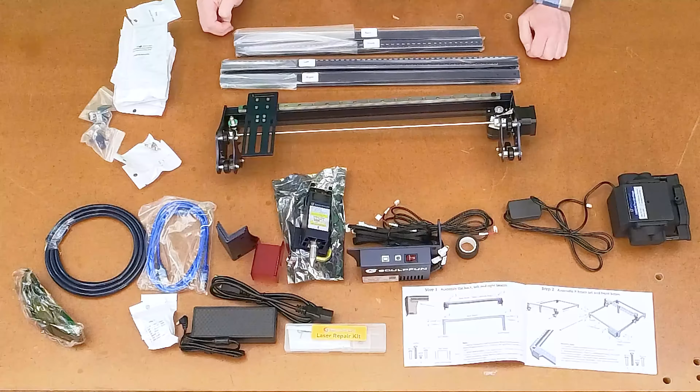I have all the pieces and parts out of the box. It looks like it's not too many pieces and parts, so it looks like it's a very doable machine to put together. Shouldn't take too long. I'll do a quick flyover with the camera so you can see what these look like up close.

The first thing I really want to take a look at is the parts bags, and it does show that this is the parts bag for step 1. And it calls out all of the different fasteners and parts that are in this parts bag. If I look at the next parts bag, this is for step 2, and it does the same thing. It calls out all the pieces and parts that are located in that bag.

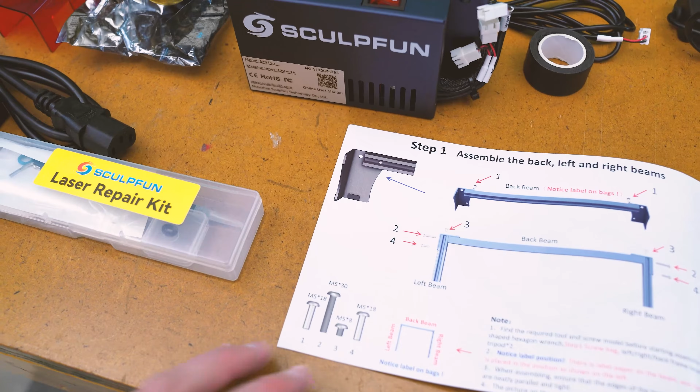When I move over to the manual, it'll show me that inside of step 1, here's screw number 1, number 2, and number 3, and that corresponds to the contents of the package. This is screw number 1, and there's 2 pieces, and so on and so forth. It covers all of this, matches up, and it clearly shows you what screw number goes in what location.

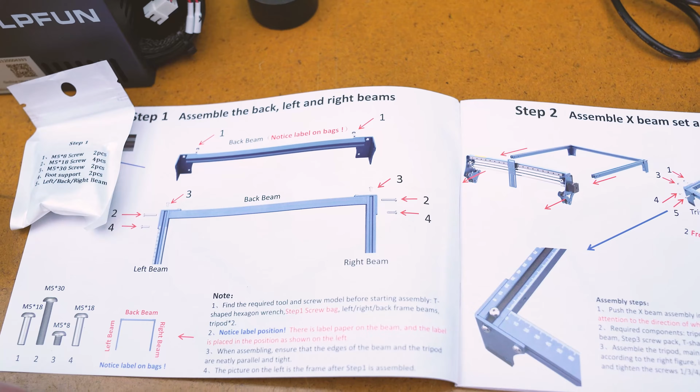Yeah, I really love the texture on the top of this power pack for the machine. It's got a neat thing. It's just one of those little things that I like to see on the machines.

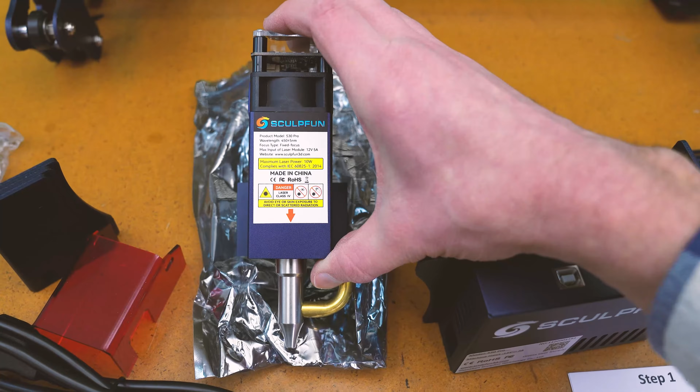And here's the star of the show, the 10-watt laser module. This has the included and installed air nozzle. Now this nozzle screws on and then is held in place with a set screw that's located right here. So this air nozzle isn't going anywhere. All metal construction, very firmly attached to the laser module itself.

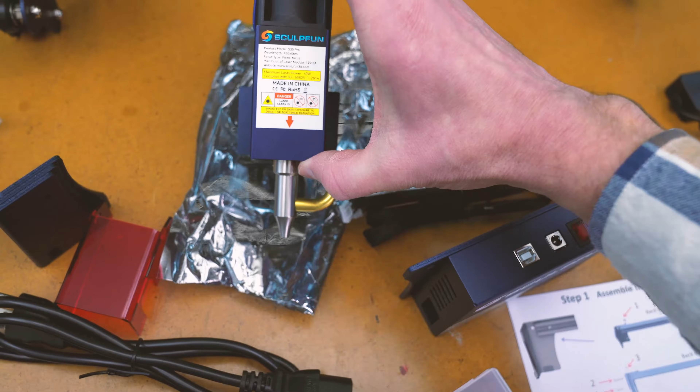Here's the main controller board. On the back is the wiring harness that comes out, and each of the ends of the wiring harness is labeled to what it gets connected to, along with the separate harness. And again, all the ends are labeled. And that's the overall theme on everything in this kit. From the rails here, everything is labeled left, right, back to front. So it's very easy to identify what part is what as it corresponds to the manual.

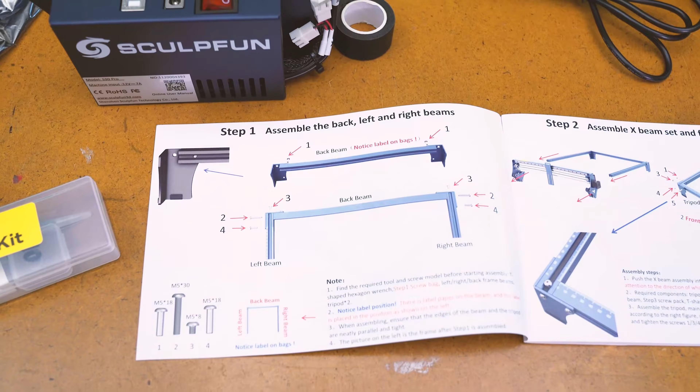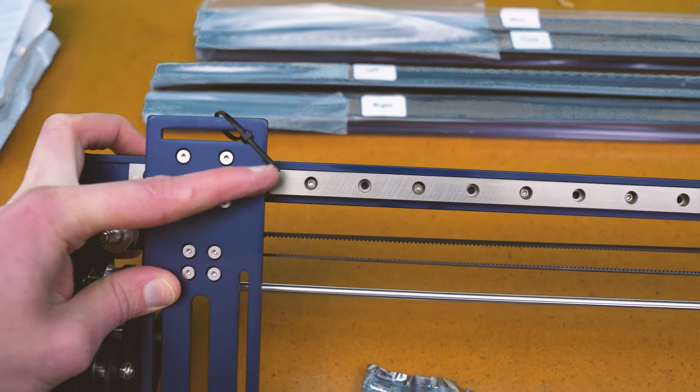There's also some pretty neat features on this top gantry, particularly this linear rail. I've used this in my industrial career, and these rails here are very precise and they offer a very long lifespan when properly maintained.

Moving on to the air pump, this is a 30 liter per minute air pump. That's about the standard for these desktop laser machines, and that will be plenty of airflow to cut through materials. On the bottom side, it does have these nice little rubber feet on here, so that as this runs, it will not walk across the table. And I have used pumps very similar to this in the past, and these things are crazy quiet while producing a lot of airflow for clean cutting.

This S30 Pro kit is very well packaged. The manual is very clear. The parts bags are clearly identified with the contents in it. I'm really excited to put this machine together, and I'll be back in just a short little bit with the machine all together.

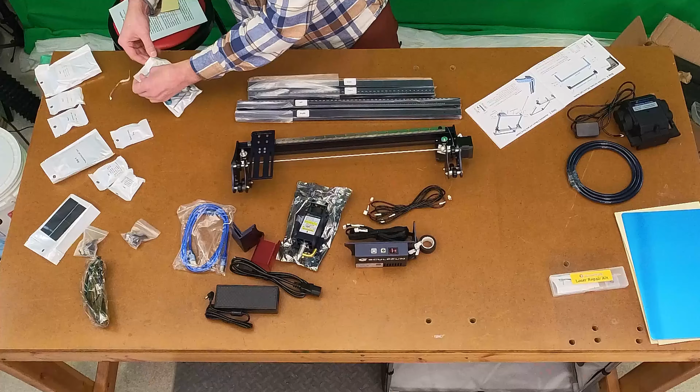Assembly of the machine is complete. I ran the wiring harnesses on the machine and installed the homing limit switches outlined in the manual. The manual did an excellent job on the placement of where all the pieces and parts go. So this kit did take me about a half hour to put together. I do want to mention that this upper gantry area is all pre-assembled, including the tensioning of the belt. That's a really neat thing that Sculpfun does to help speed up the assembly process of the machine.

As I had mentioned in the beginning of the video, there's a couple really neat and innovative features that really drew my attention to this S30 Pro machine. The first one being this linear rail with the precision bearing located just behind the laser module. And I really like this because during the engraving, typically this x-axis is the one shuttling back and forth, putting all the mileage on the rail.

And it's nice to know that it's on a ball bearing rail that is precise and requires just a little bit of maintenance of a light grease and the occasional cleaning. But this is going to provide many years of service that's going to be very precise. I really like that. The other really cool thing about this kit is the included air assist kit.

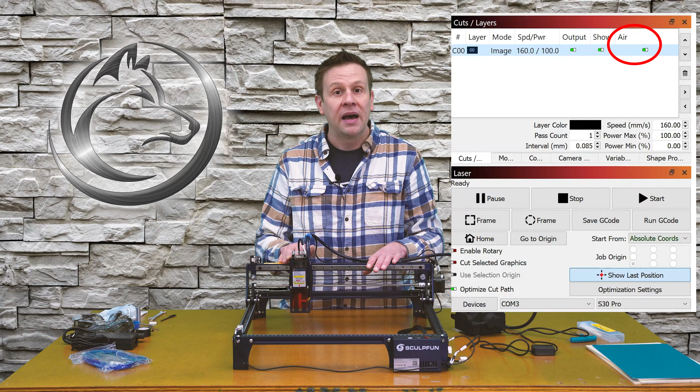And this leads into the other really neat thing about this air pump: it gets the power from the controller board of the machine. Now, when I have this machine connected to Lightburn software, it has this option inside your project for each layer that I can turn the air assist pump on or off. So that's now functional on this machine. All the other machines that I have, that little toggle switch inside Lightburn software does not do anything.

Me as the user always had to manually turn my air assist pump on or off depending on what I'm doing. But now that little checkbox in Lightburn is actually connected to this output that turns on and off the air pump. So it's really cool that down at this price point in the diode laser tabletop machine, that feature is now functional. I think it's long overdue, and it's a really great option to have on the machine.

I can't wait to check out running this laser module. Sculpfun states that it is very precise. It cuts very cleanly while still being able to engrave beautiful objects and images. I want to check that out. So to do that, I'm going to connect this machine up to the Lightburn software. Before I do that, I'm going to finish connecting the power up to the controller board along with the USB cable that is included with the machine. So next time you see me, I will be in the Lightburn software connecting this machine up to it for the very first time.

Hey, before I jump into Lightburn, I just wanted to tell you that this is my favorite part of these machine projects, connecting the machine up to the Lightburn software, because that means we almost have a fully functional machine that we can start creating projects on.

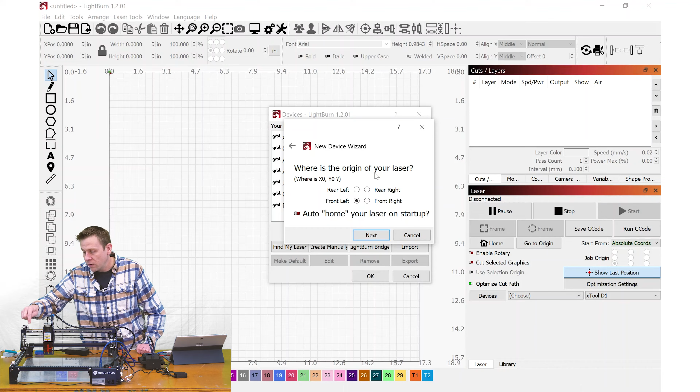I'm going to click Add Device, and I'm going to rename it to S30 Pro. I can click Next. And where's the origin of the laser? What they mean is, where are the limit switches? This is going to be the lower left-hand corner of the machine, right here. So that is going to be the front left. I'm going to click Next. And this all looks correct.

Finish. Okay. Now I can go back over here to the bottom of the list, S30 Pro. Click on that, and we'll see that, yep, it is connected. It says that the laser is ready. For the moment of truth, I'm going to hit the home button, and I get this error 5, homing cycle not enabled in GRBL settings. That means I need to navigate over to Edit, Machine Settings, and we'll see homing cycle right here. I need to turn that on.

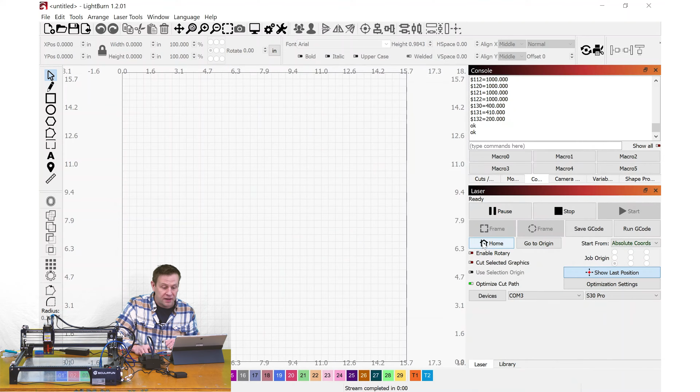And now when I hit the home button, we'll see that it travels over to the home position. Now that the machine is homed, we should have a fully functional machine. To do a quick demonstration, I am going to draw a box in the middle of this work area, and ask the machine to frame that out, so it should move over here and draw out this box that we see in Lightburn. That's really neat. I'm going to tell it to go back to the home position.

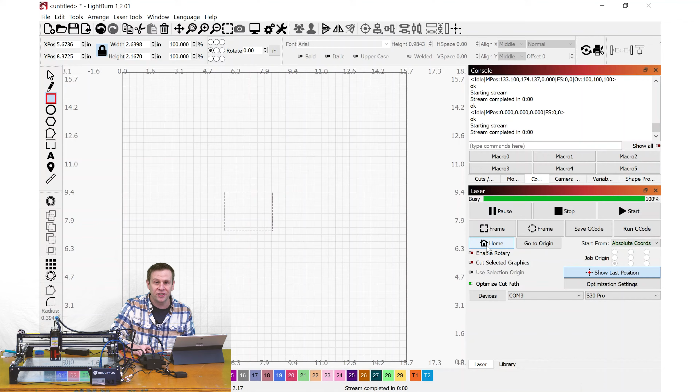This is just one of the really neat things that I like about using Lightburn software with these machines: it connects very quickly. Most of the time, the software will automatically find your machine, know what it is, put all the secret settings in for you, and the machine is ready to use. Things are really moving along with this machine. In early afternoon, I'm able to unbox the machine, put it together, and get it connected to the computer right away.

I have this aluminum backer board that I like to place underneath my machine. That way, if I tell the laser to go in a spot where there's no project material, I don't accidentally engrave or cut into my table. I also have this backer board taped down to the table so I don't accidentally shift it around while the machine is running, which would also shift my work around.

Speaking of work material, I have this 1/4-inch piece of plywood I'm going to place in the work area, and I'm going to do a test engraving of a photo image on it to see what the grayscale engraving looks like.

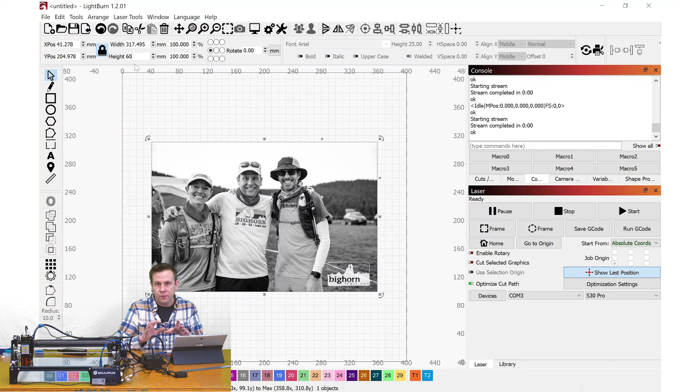I have my photo imported into Lightburn. I measured the height of my project material wood, and it's about 70 millimeters. So I'm going to make my photo image height 60 millimeters. That way I have a little room for error. I invite you on your projects though to take the time that you need to, but in these videos I speed things up to try and keep the video length down to a manageable size.

I'm going to navigate to cuts and layers. And I'm going to double click on this and I'm going to use a speed of, let's say, 160 millimeters per second. And I'm going to unclick pass through, and that will open up the image mode. And I'm going to go all the way down to grayscale. And now my max power I'm going to set at 100, and the minimum value will be at 0.

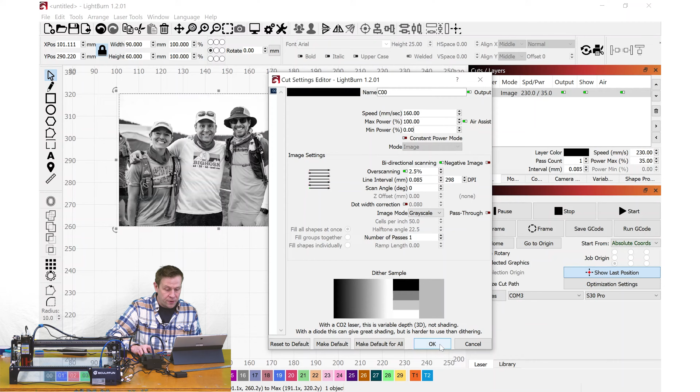And a quick explanation of that is anywhere there's something that is all black, it will engrave at 100% power, and anything that is washed out or just white, it will not send any power out there. But all of these gray tones in between, it will figure out what power level it needs.

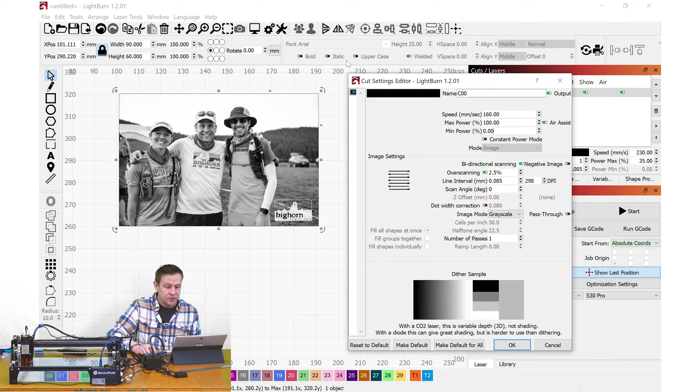So I like using this image because the sky is just bleached out white, and then I get to the trees in the background that's fairly dark, followed by the grass that's a lighter shade of gray, and it has this race logo emblem here, and then all three people have different colored shirts that show up as a different part of the grayscale. So this is about 50% gray, maybe a little bit lighter. This shirt is white and there's some shadowing across it, and then this shirt here with the backpack is a little bit darker.

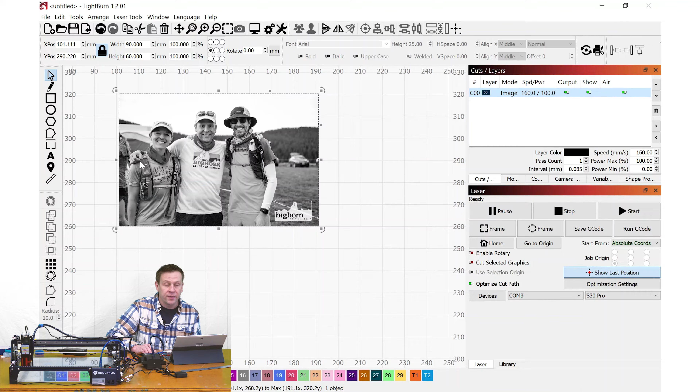If I'm wondering how long this is going to take, I can click on the preview button up at the top of the screen, and I will see this will take about 12 minutes. So I'll catch you in about 12 minutes.

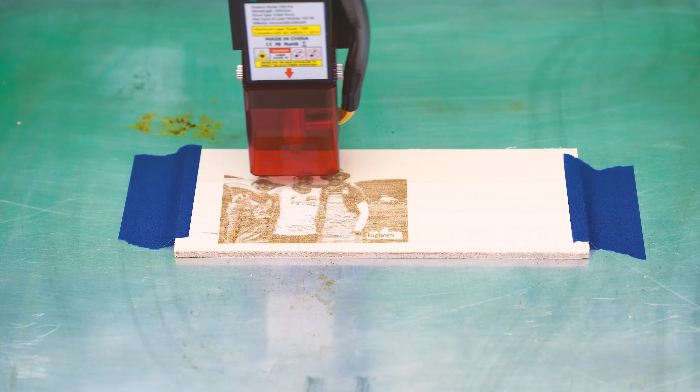Taking a closer look, I see that this image really turned out very, very well. I'm really pleased with the results. Wow, I'm really impressed with the results with this. I didn't do any image preparation for this. I just imported the image into LightBurn and did the setup that I showed you, and I hit the go button on this and got these really good results. In fact, I'll show you a close-up view of this along with the black and white image in LightBurn, and maybe those will be located up in this area here.

Now, I do want to note that this was estimated to take about 12 minutes. This actually ran for about 30 minutes, so it took much longer than I expected. However, I'm loving the results, so it'll be up to you as a user, knowing that this may take a little bit longer, but the results are really, really good.

Now that we've engraved, I want to do some test cutouts, so I'm going to use this open area over here, and I'm going to do some circle cutouts through this 1/4-inch piece of plywood. And for that, I'll be using some honeycomb on top of my workbed area, and the honeycomb allows the airflow to pass through the wood and not have any of that smoke stain the backside of the wood.

Here's the honeycomb that I have, and I like to attach my projects to the honeycomb using magnets. So one of the key features that I look for when selecting honeycomb is that magnets will stick to it.

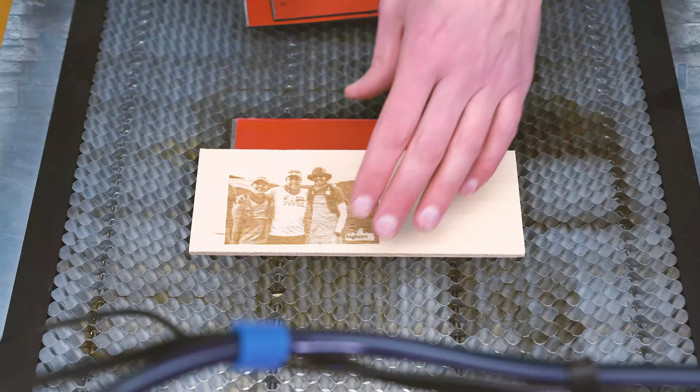Here's what I love about having a magnetic honeycomb. I can place my magnetic strips in and kind of box my work material so it can't shift around. This also allows me to remove the work material, inspect it, and replace it back in, and I know that it's perfectly aligned. Along with, if I have multiples of a work material project, I can keep placing new material in and just simply hit the start button. I don't have to reposition anything.

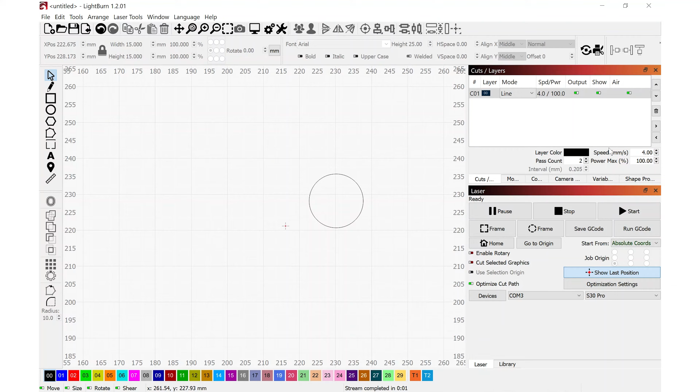I've replaced the photo image with this, a circle that is 15 millimeters in diameter, and I've readjusted my settings for a speed of 4 millimeters per second at a power level of 100%, 2 passes, and I changed the mode to line so that it will cut this out. I've set the focus and I framed the project out. Everything looks good, and I also have this little toggle switch on, which means the air assist kit will turn on automatically when I start the project.

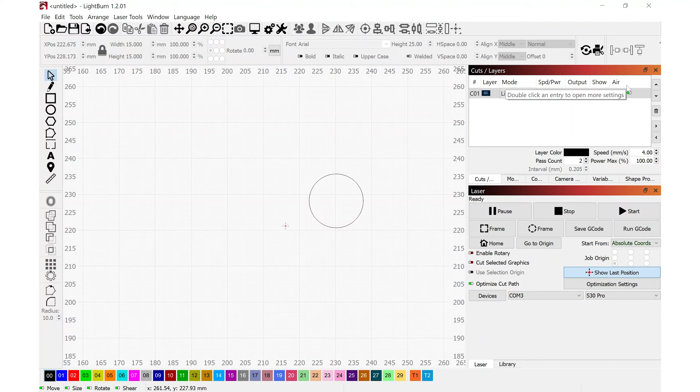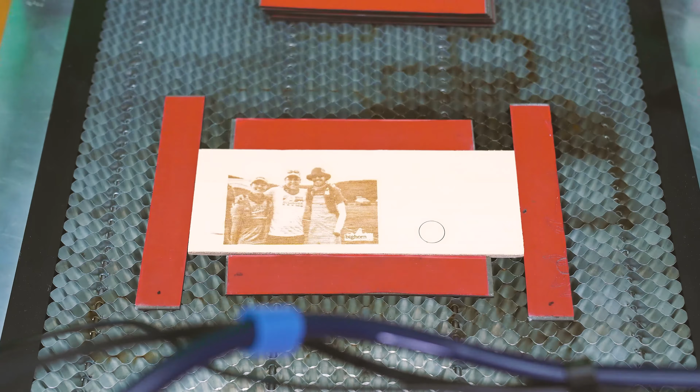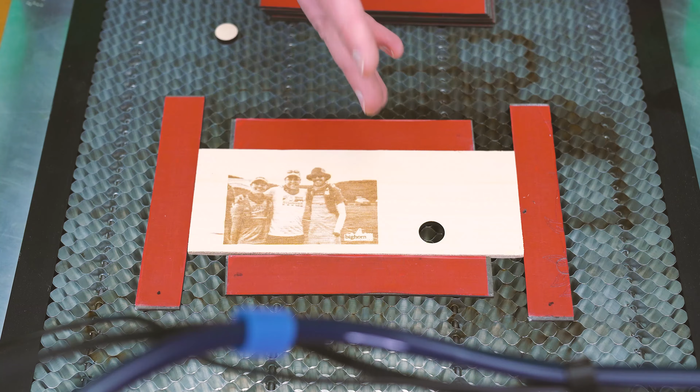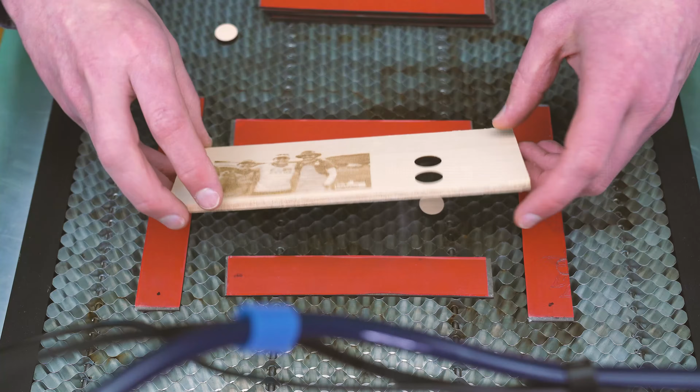That took just a few seconds, and we'll see that I lift my work material out and I've got this perfect circle that cut so cleanly. I'm going to see if it'll do that in one pass. Let some of that smoke clear. And wow, look at that. In just one pass, it easily cut all the way through.

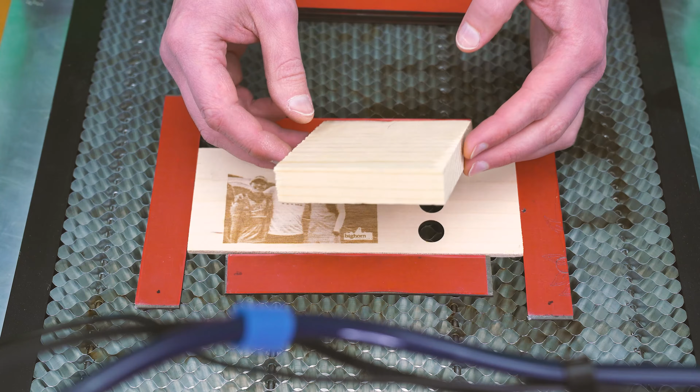The last thing I'd like to check out is this solid 3/4 inch piece of pine board. Now, this machine isn't advertised that it can cut through something this thick, but I want to see if it can do it, and if it can't, just how far it can cut through.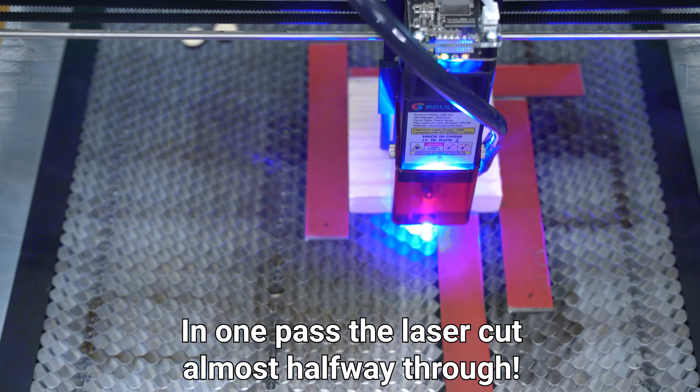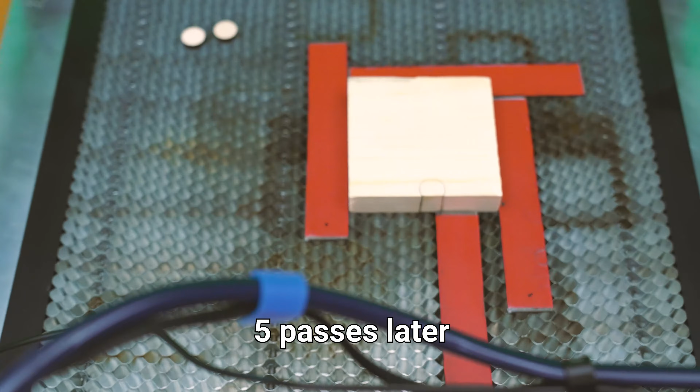That first pass, it cut almost halfway through. I'm going to increase the pass count up to, let's say, 5 passes. We'll see that that just about made it all the way through. I'm going to run this one more time.

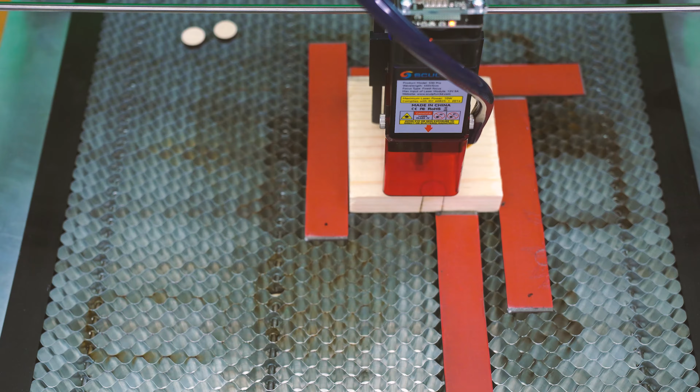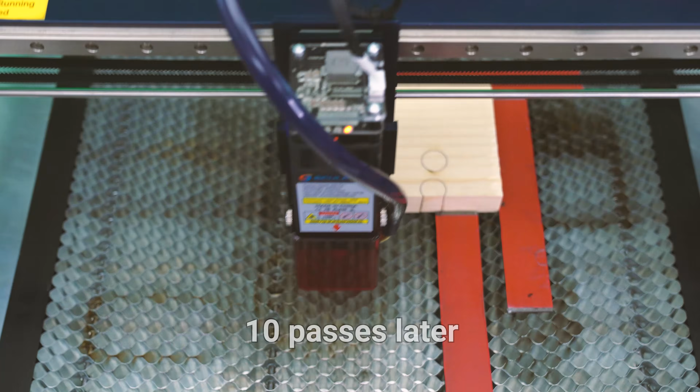However, this time the laser is going to start over the wood and do the complete cutout in the block of wood. I'm going to increase the pass count from 5 to 10 because we were just about through before. And I think with 10 passes, this should make it all the way through. We'll check out what this looks like. Only 2 tiny little spots where it didn't connect all the way through. And I think this will press out. There it is. It did cut all the way through a 3/4 inch piece of pine board.

I have to say, I'm really impressed by the performance of this machine. I like the grayscale engraving that I did with this image, just threw an image in Lightburn and sent it out through the engraver, and I got some really good results. It did take much longer than expected, but I'd rather have good results take longer than have bad results take less time, if that makes sense.

I like how cleanly cut the holes went through on this 1/4 inch plywood on the front and also on the back. I was able to do this in just one pass at a reasonable speed. That's in line with these tabletop laser diode machines. Then I pushed the machine to the extreme with what you just saw, cutting a hole through a 3/4 inch piece of pine board. I started out with the laser starting off the board. That way I could see how deep it cut with each pass.

In the first pass, it cut nearly halfway through the board, with the second pass being about 3/4 of the board. And then after that, the laser starts to get out of focus and it can't deliver all the energy it would really need to effectively keep cutting through the board. But when I did the test in the middle of the board and I added more passes, we were able to get enough energy to the bottom side of this board to cut all the way through.